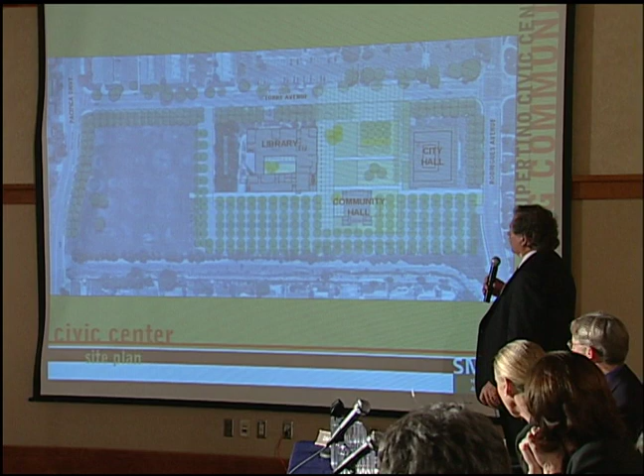The Civic Center, if you could go to the aerial, yeah, we could kill the lights now. Thank you, Kathy. As you can see, the concept, which went through all the community meetings and was initially approved by the City Council, has the library in the place of the original library as it stands today, a community hall, which is in this configuration and near the existing City Hall.

You'll see a great deal more detail from the architects on this, but just to introduce this concept, it extends way beyond just the central plaza. The parking lot is being reconfigured, and the sidewalk in front as well, and then this grand plaza, which will be at the level of the library and the City Hall, rather than depressed as it is now.

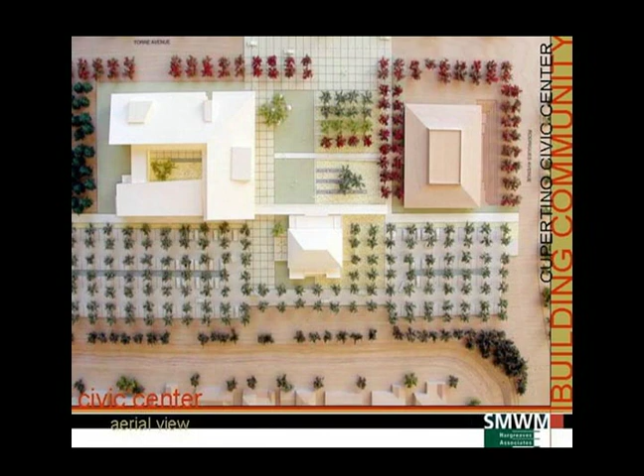One corner of it will be depressed, and we'll show you how that works later on in the presentation. It's important to note that with this combination of buildings, the library sits in a very large footprint here, containing all of its programs, and the community hall over here is designed with an architecture and a style that will not allow the library to overpower it. This building is 1/10 the floor space of this building, and so it's important that it stand out. It's a centerpiece of the plaza.

The library occupies a very good location and a grand space that will help frame this plaza from one end to the other. Could we go to the next slide? Let's go to the next one.

Before we begin talking about the community hall, I just wanted to note that this entire plaza, this Civic Center, includes the library, includes the community hall, and includes the existing City Hall. Ties them all together and creates a very grand space. That's something that those of us who've lived in Cupertino and those of us who followed the city have all felt was missing in our city for some time. This is the opportunity, as the city manager said, in the life cycle of a city, it's a rare opportunity that you get to do this, and this is our one golden opportunity, and we think this solution is one that everyone will enjoy and be proud of.

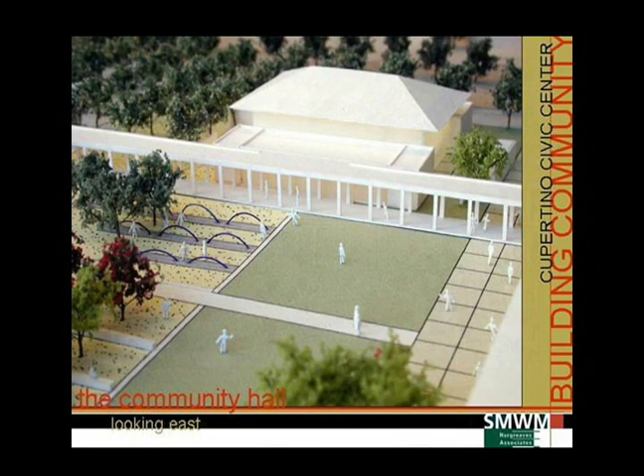I'm going to introduce two architects. The first to speak is Kathy Simon, who is the senior partner of SMWM, our design architects, and secondly, our landscape architect who has designed the plaza, Mary Margaret Jones of Hargreaves Associates. Kathy? Do I have to push that? No, you're on. Thank you, Ralph.

Mr. Mayor and members of the council, we're absolutely thrilled to be here today. This is a very, very important day for us, and I hope for you. I'd like to go through the design a little bit. You have a model in front of you. I hope that all of the people in the audience and you have had a chance to look at some of the drawings, which we'll also show here.

But the idea is to make the most gregarious, friendly, civic space we can, with an array of buildings that in their own way make a community here, but that are really for your community. It's a way that you can bring people with many different activities, including civic activities and gatherings of organizations like the Rotary Club, for example, or the Boy Scouts, or any number of things that could happen here. Weddings, you'll see, things will come to this space. And to share that with the City Hall and then with the library. This makes a place in Cupertino for everyone, a welcoming, wonderful place for people.

Next. I'd like to talk a little bit now about the community hall. It has a very simple plan. It faces the Civic Plaza. It's protected from the sun and rain by a covered walkway which connects it to the library and to the City Hall. Coming down from the plaza, you can come straight in on the axis of Town Center Lane, or come in on a wide plaza from Torre Avenue and enter the lobby of the community hall, which is also in itself a large space, a wonderful ante-space for meetings, a place of gathering before going into an event, and so on. The community hall serves many, many different purposes. In this case, we've shown it as a meeting room, which accommodates a large number of people.

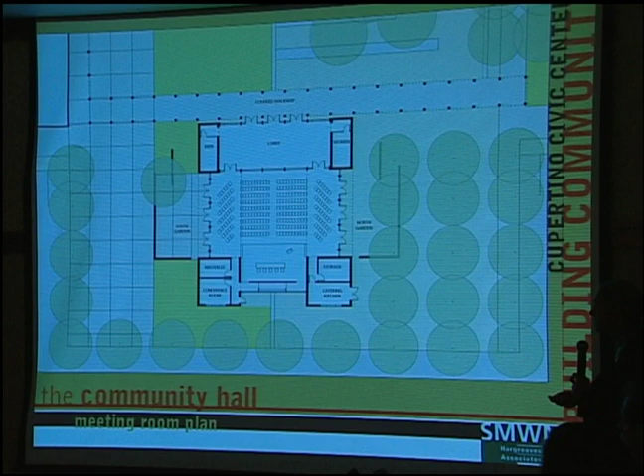Go back one more. It has a south garden and north garden, which means that the building is very open and what we call transparent. It means when you're in this building and in events where it's appropriate, you can see outside, see the trees, see the light of the sky, see the landscape. It has a raised platform, which has, again, many purposes, and some support spaces, including a catering kitchen, which will help the multi-use function of this building, but also a conference room for smaller meetings that might be pre-meetings or so on. Next. This is what it might look like set up as a meeting. It's a very tall, classic space.

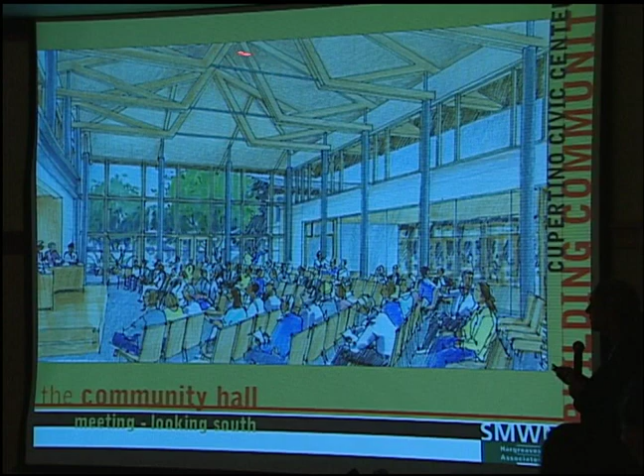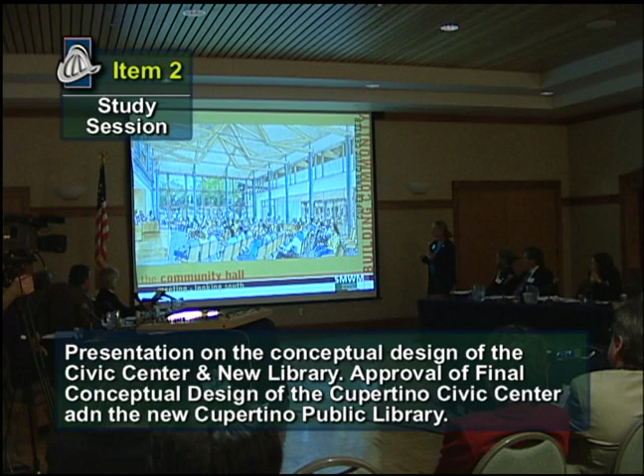A lot of parts of it are made of wood and stone. It has a beautiful open ceiling, which is uplifting. And again, these views out all the time to the landscape that's going to be so pretty in Cupertino, and already is. This shows the platform in a meeting configuration. This could be a council meeting or a seminar, and a very comfortable array of people.

Again, the dais might contain seating, but it also might contain a lectern, and it might contain a jazz quartet, for example, as shown in this rendering, where here you see a night view of what a dinner might be like in Cupertino's new community hall, with, again, a lit-up landscape outside with possibly a pre-function space, for example, in this south garden, beautiful lanterns that light up the space, and then music or events or speakers, a convivial place for people to come together.

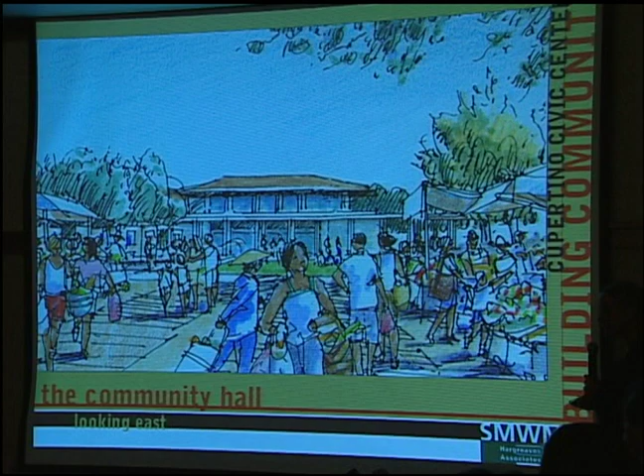Next. The idea of the building architecturally is that it's both civic and informal. It's very much an indoor-outdoor building, a building which looks out to the community space in front of it, which looks to the landscape, and which looks to the sky. It's a tall building. It holds its own with the City Hall, which is also a large building, and the library. It forms a transition from the architecture of the City Hall to the new library as well.

It makes a family of buildings here. But in no way is it like a child to these other buildings. It has a presence, it has civic energy and civic heft. It also has a wonderful forecourt, which Mary Margaret will tell you about, which is a gathering space for all kinds of people. Next. The library is a more complex building, a larger building.

It's about 57,000 square feet. It's, again, a very open building. Its entry is on axis with the City Hall. It's connected, as I said, by loggias. In this case, there's a covered arcade that's on the ground floor of the library, and we're proposing that at the corner of Torre and the Civic Plaza, the library actually house a little cafe, which is really the trend in libraries today, and could then be a place where somebody who's spending a lot of time in the library could go for a coffee.

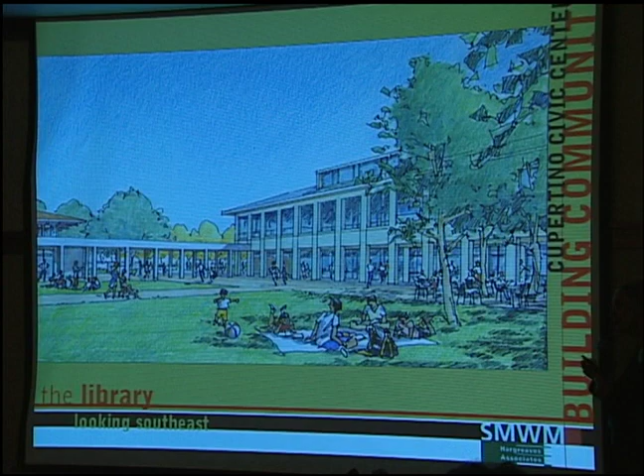It's a place that families could use to buy picnic food. It's a place where people wanting just to take a break from studying can go sit around outside or inside. It's a small area, but it really can enliven this civic space and the library as well. It's not part of the library in the sense that you have to go outside to get to it, which solves the problem of the control of the library, which is very important to all of you and to the librarians, of course. But it's a very good partner with libraries. And every library that I've seen being done today has, if they can possibly do it, a cafe like this.

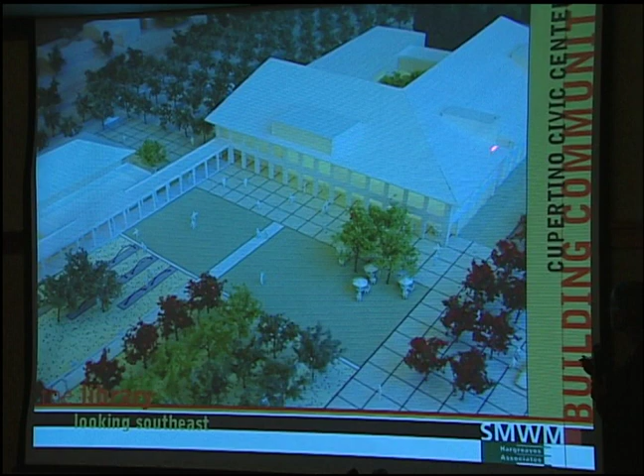Again, this loggia you can see in this model photograph. The library has a great roof, which houses above, on the second floor, the major stacks of the library for adults. Light is brought into it to illuminate the entry to the building and the stairway that connects the two floors. Again, you remember that there's a courtyard in this building and a side that's also civic along Torre Avenue. The materials are simple: stone, wood, metal, glass.

It's very open. This shows the connection between the library and the City Hall and the civic community hall here. This is the cafe. We have little model tables and umbrellas, which I urge you to look at. And this is Torre Avenue, so you can see what the whole space is like as an ensemble, a collection of buildings that are related but distinctive.

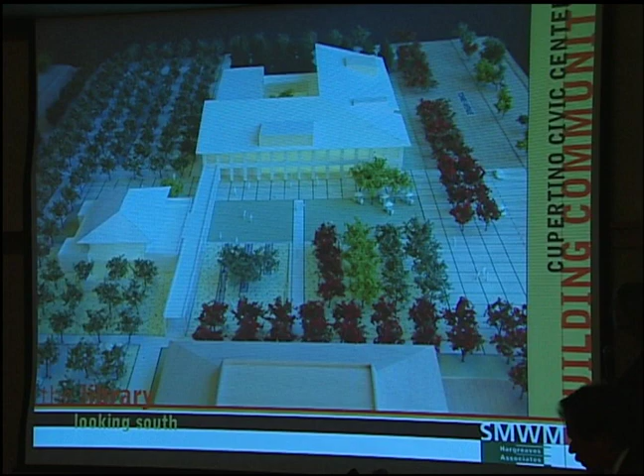Next. The plan of the library, I'll just mention very simple elements. This is the entry. You come through the control point, which makes sure that the books are secured and always checked out. There's a Friends area right at that lobby and the circulation desk. And again, the view through this will look right at this courtyard, which opens a little bit to get even more light and better views of the Redwood Grove to the south.

This is the staff area, which is a large area, very important for a library of this size, and Friends area for their storage of books. If you come in and you walk to the right, you see the browsing area, which is new books, magazines, informal reading, again, very connected to both the Civic Plaza and to Torre.

And then the large children's area. One of the really special things about the Cupertino program for a library is that a very, very large part of it is dedicated to children, which in my view is a wonderful investment in the future of this community and the future of our country. It's very large. It has room for little kids and big kids. It has a story room that looks out into the redwoods. It has a group study room for homework.

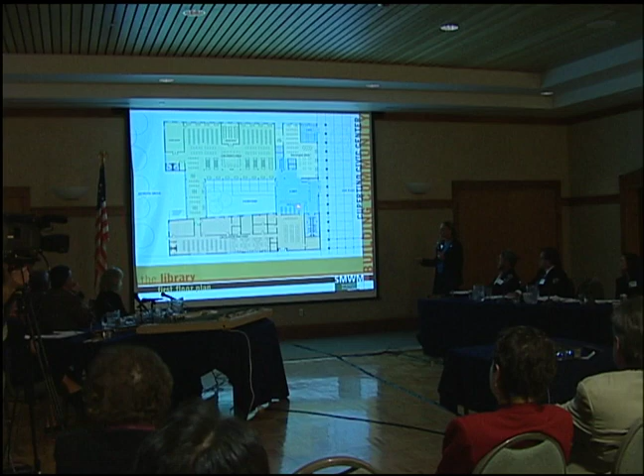And again, this wonderful courtyard, which it's related to, and I can imagine on a beautiful day, a story time happening out in this courtyard, or mothers and fathers reading to their kids in the library courtyard, which is a beautiful outdoor space. We're so blessed here to have such a wonderful climate, and you especially in Cupertino, it's unlike San Francisco, which is freezing all the time. This is actually a very affable climate. So the indoor-outdoor life of this building can happen in a secured way, as the community hall is an indoor-outdoor building as well.

Next. You go up the stairs and you find the adult collections. In this part of the library, which faces the Civic Plaza, there's the young adults, a large reference area, and the adult collections will be separated by fiction and nonfiction. There are so many settings in this building for reading and enjoyment, I think, of books and being in a community space like this. You can sit looking at the courtyard. You can sit along the edge looking at the Civic Plaza. If you choose, you can sit looking at Torre.

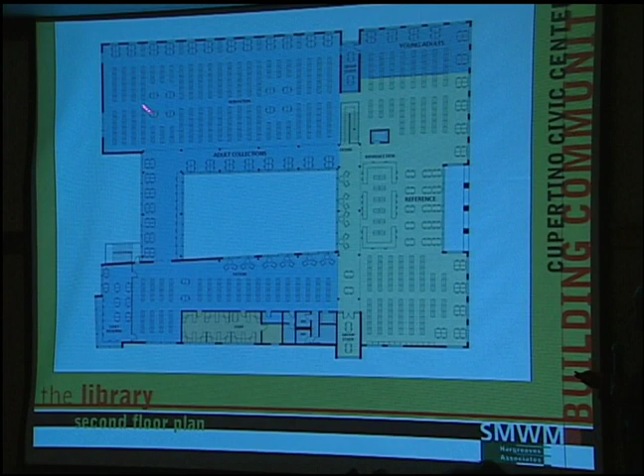Many people will be able to choose what they really, really enjoy the most about being in a beautiful building with a lot of wonderful books and other materials. There are some tables that are actually within the stacks. This is something that's done very frequently in libraries, so that someone looking for a book has a very convenient place to sit down and rest or read.

Next. This rendering shows what it might look like from the second floor, where there's a big reference desk as you come up the stairs, looking into the courtyard, and you can see the redwood trees behind, the wonderful view down this side of the courtyard toward the redwood grove again. And the idea is to really borrow the landscape that you have around this building and bring it in. The building will be filled with light. There's a large, what we call clerestory window, a large raised window on this side of the courtyard and this side, which will bring light deep into the library.

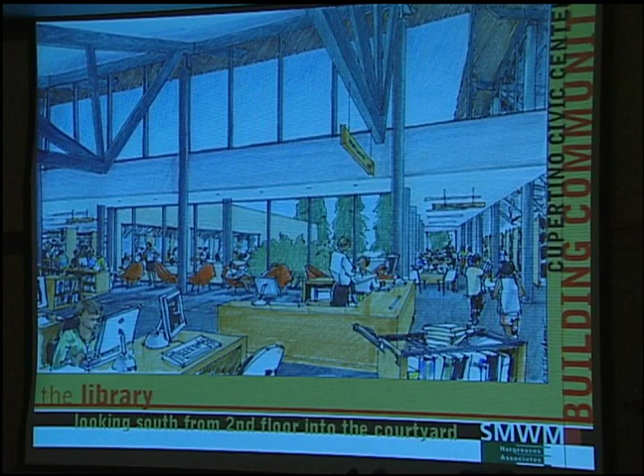It's very important to have enough room in a library like this for all the books, but it's also important to remember that reading and the life of the mind are about light. And this is a building that will be very light and airy, very friendly, and very open. Next. Mary Margaret's now going to talk about the Civic Plaza and its details. Thank you, Kathy. Next, Laura.

One of the things that was really important to us as we began this process was to conceive of a place that would be distinct to Cupertino and distinct within Cupertino. And one of the things we thought about is the history of this valley and the landscape history of this valley, which is pretty spectacular. It was originally part of the Valley of Heart's Delight, which was full of orchards. It's now Silicon Valley. But that landscape heritage led us to thinking about this place as a very distinct place, set apart from the rest of Cupertino. So not dominated by cars, not dominated by asphalt, but instead dominated by trees, the orchard effect, and the idea of an oasis that is a civic heart of Cupertino.

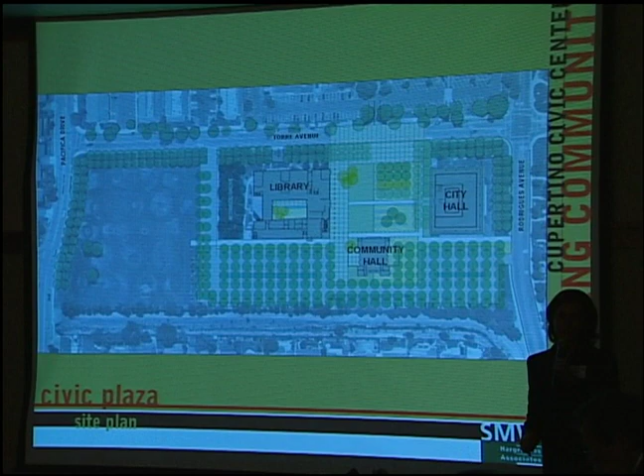So you can see in that plan image and in this model image, and in this case we're looking from Torre, here's Torre Avenue. The central Civic Plaza is a very welcoming space, it's a very open space. It creates an opening from Torre that welcomes you in. And then surrounding it, the parking lot becomes an orchard system. So you're parking beneath shade, and the climate is changed, and it gives a setting for the community hall to be a place within gardens, a place within landscape, and a place within these beautiful orchards.

So the plaza proper between City Hall, the Community Hall, and the library becomes a central gathering space that is very multi-use. So it can be one big space in a very grand and elegant way, but within that it has a variety of kinds of spaces as well, and a variety of things going on, so it will be very active and will draw people to it. The plaza along Torre wraps and fronts the library, and the cafe within the shade of the trees that Kathy mentioned happens at this corner at Torre.

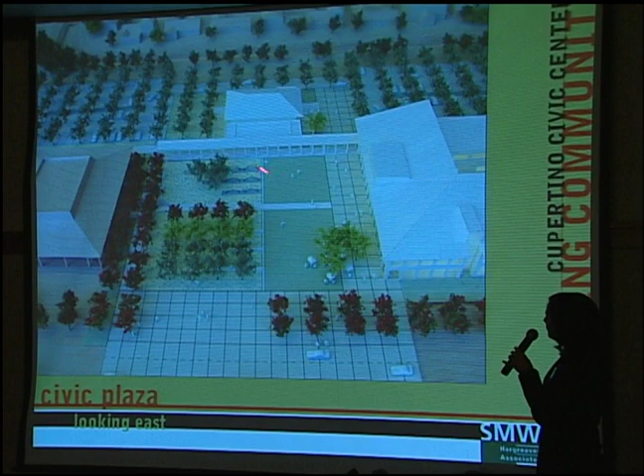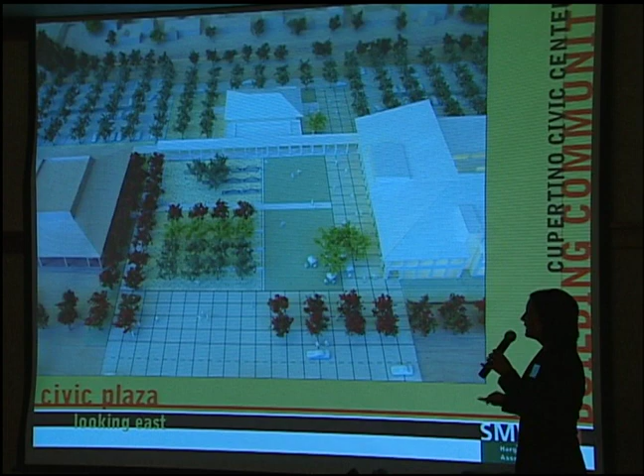Lawn areas become a place of softness, a place of respite, but they are at the same level as the doorways of the community hall and the library. And then you have a room here that is a room within an outdoor room within a grove of trees. And this grove of trees might be the trees of Cupertino. So we might choose 4 very distinct trees to feature in these rows that are the trees of Cupertino. And then seating beneath this grove of trees.

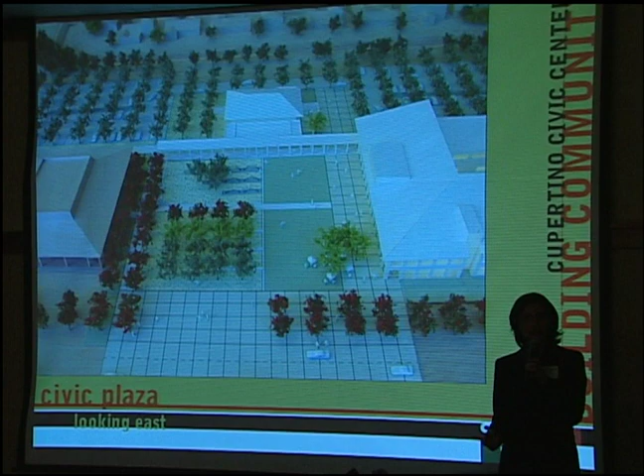And the material then in this area might be a very soft material like decomposed granite or crushed stone that is somewhat in between paving and grass. So it's porous, so the trees are happy, the trees thrive, they grow, but it's also hard enough so you can set up a festival, you can set up a performance event, and people can enjoy a very active space.

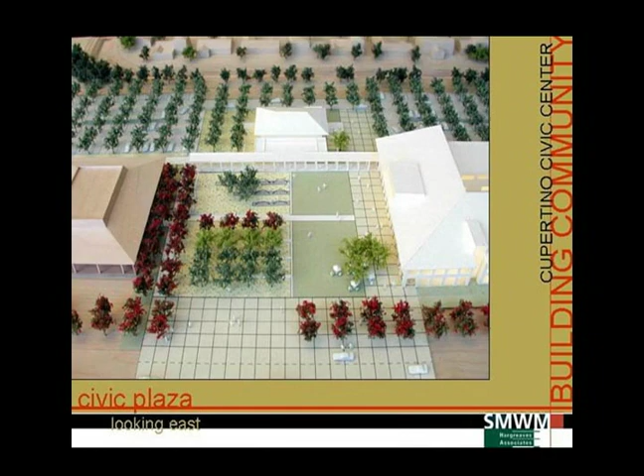And then in this quadrant of the space, and so in a way it's halves this way, and it's quadrants. In this quadrant you have a smaller grove of trees and a fountain. So it's a very sort of interactive fountain.

It's a place to, thanks, Greg. Get those lights back on.

It's a place to play within jets of water that are very whimsical, not using lots of water, but getting as much benefit as possible from the sound of water and the white noise it can bring to a space and the activity it can bring to a space as kids flock to be within the sphere of the water.

Next. So you can see this overall space that is then broken down into rooms within the overall space. You can see Community Hall then sitting within an extension of Civic Plaza, and then within that, the 2 gardens that Kathy mentioned, the North Garden and the South Garden, that could be quite different one from another. They might be sister city gardens. We'll develop that idea more, but one's on the sunny side and one's on the shady side, and that can be played up in their design.

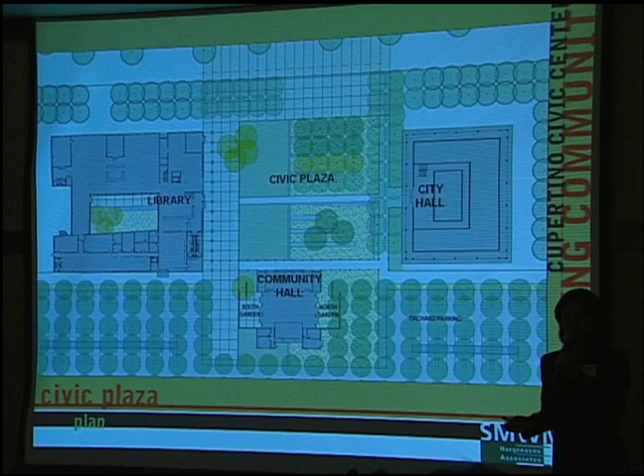And then all of that sitting within a reconceived parking area that includes trees, as well as a more efficient layout for the cars. Now, one of the things we wanted to do is address the fact that there is a very strong central axis to this space from Town Center Lane. Next. And you can see how this space is arranged on that axis.

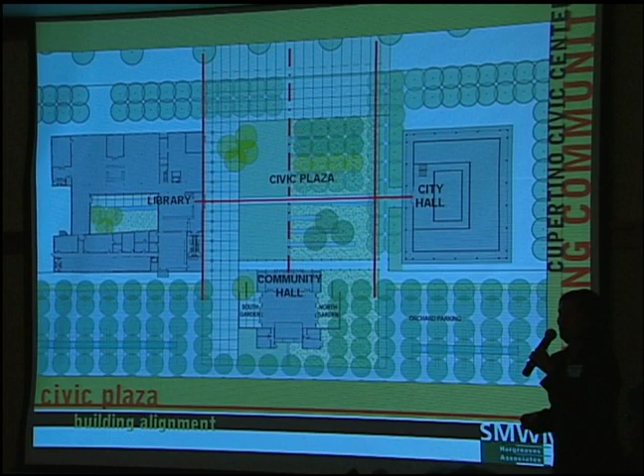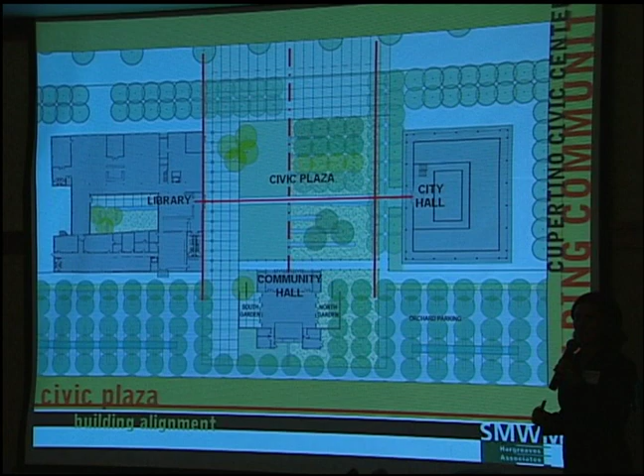So it's symmetrically arranged in terms of the library, City Hall, the Community Hall, and the center line of Town Center Lane. But the design of the plaza itself is not slavish to that formality. It uses it, it makes an elegant space, but it also makes a space that has a little more playfulness and not quite the stiff formality that we would have if we just followed those lines.

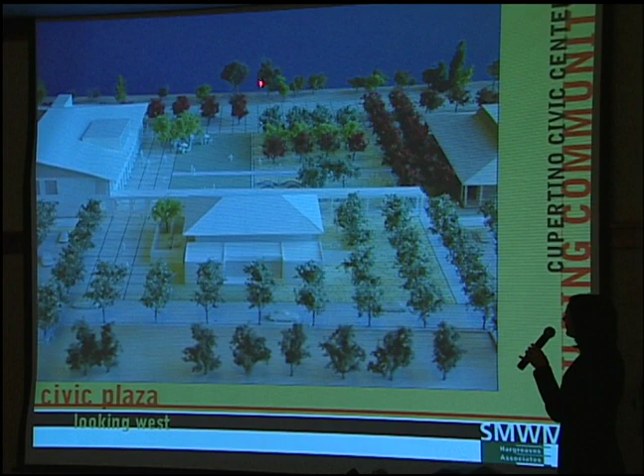Next. So you can see, looking from the Community Hall toward Town Center Lane, the fabulous mature heritage oaks that frame that axis, and you get this central axis. And on that central axis would be very beautiful special paving, so that it is literally drawn in the ground, and you're aware of that center line, and it's the division between the lawn and the decomposed granite.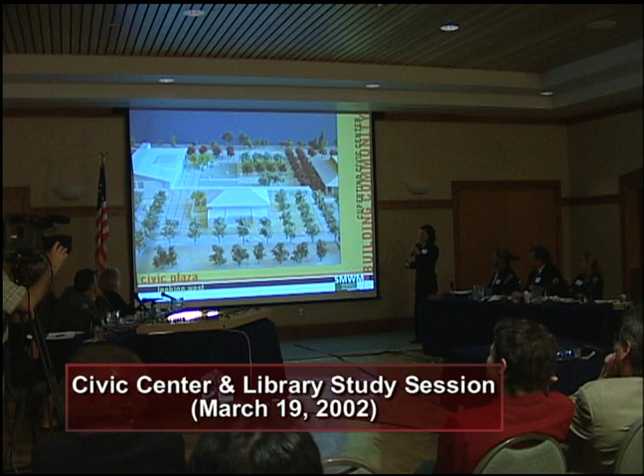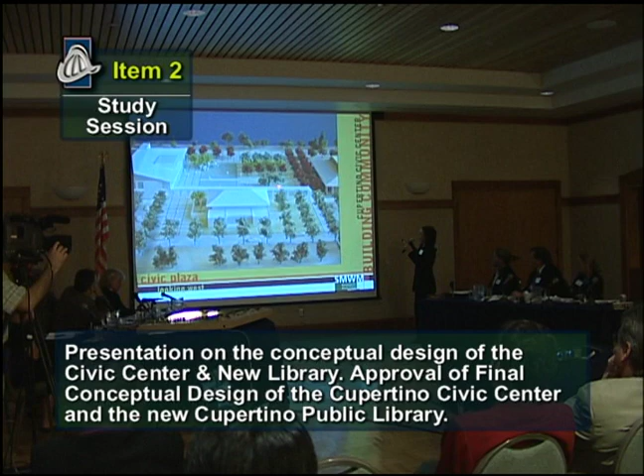It's sort of playful. It engages people noticing that this is the way the space is arranged, and so it invites participation. And you can see the cafe under the trees, the fountain area, and you can see another feature, barely, it'll show more in some other images, but there are terraces along this edge. So there is a walkway from the library to City Hall.

City Hall is set apart somewhat. City Hall is set apart by these alleys of trees, these rows of trees, so that City Hall has a certain separation from the more vibrant activity of the plaza, and the library and the Community Hall have a much more direct engagement with that vibrancy of the plaza.

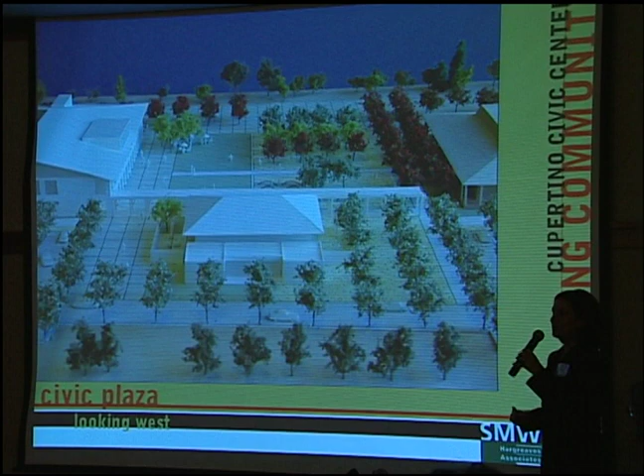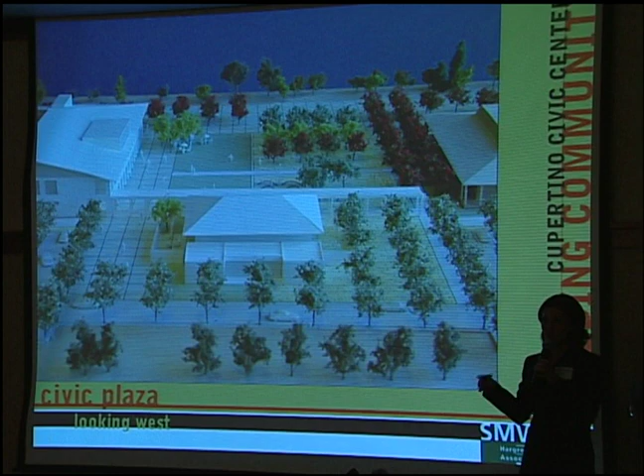And then here, this part of the plaza is slightly sunk 2 to 3 feet, so that there are terraces. And those people right there are sitting on those terraces. So it forms a small amphitheater, much different than the kind of space that's out there now, where the whole thing becomes a bathtub. This is more a tilt, so you have one corner that becomes a seating corner.

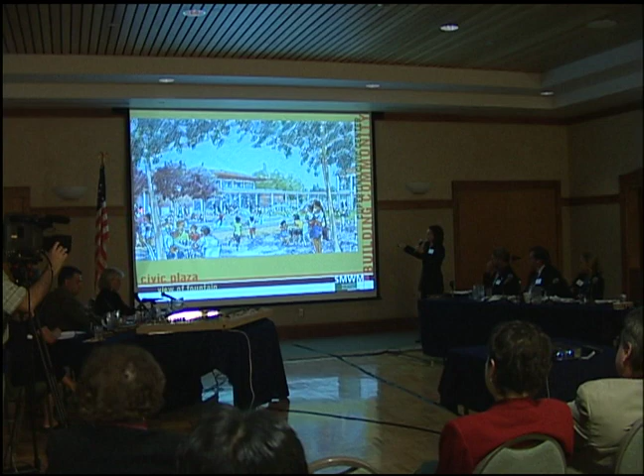Next. And you can see in this image then, those terraces are here along this edge, and then the fountain area is here, so that it is a fountain that when the jets are off will still feel like a garden space, a plaza space, and when the jets are on, it's something entirely different.

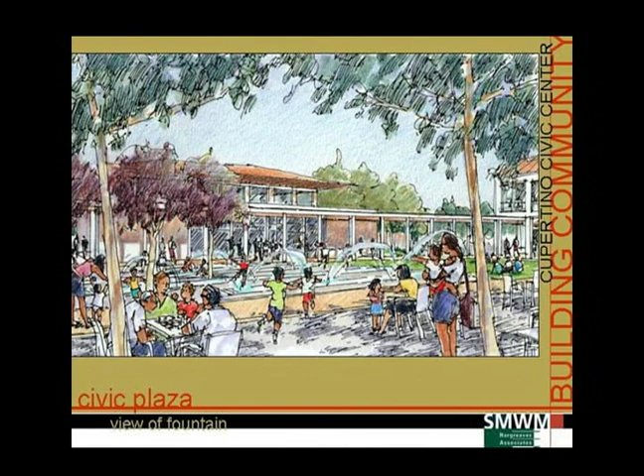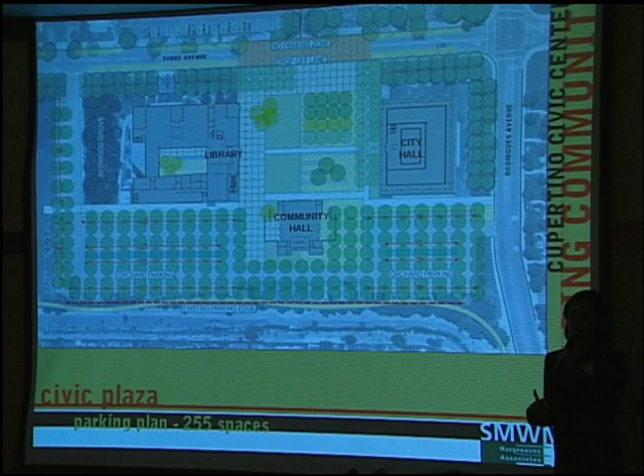Now, one of the inherent goals of this project is to make the parking lot more efficient and to have this project address Torre in a more active way. So you can see both of those things in this drawing. The plaza would literally extend across Torre and claim the street so that it becomes the front door to the plaza and you are invited in.

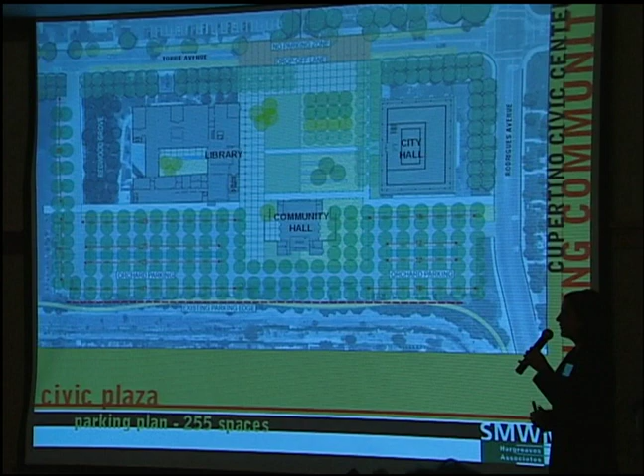And there would be no parking in that zone, and there would be drop-off for the City Hall and Library and Plaza and Community Hall. And the parking is then reoriented so it faces in a much more efficient way, and the aisles work much better for movement through the parking lot, though not creating a through freeway. And the parking becomes an orchard so that you're parking beneath the shade of the trees.

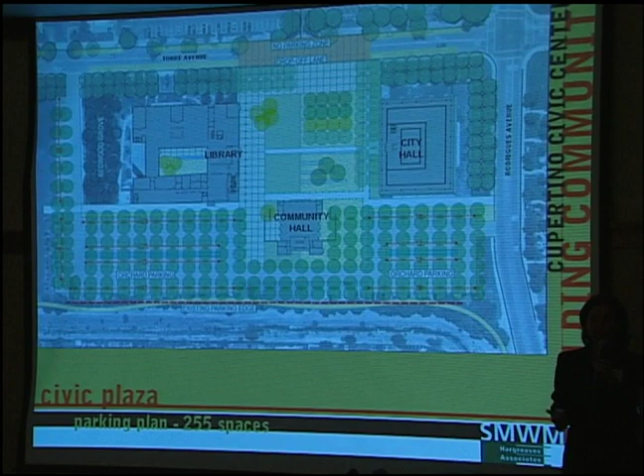It's 255 spaces total, including the parallel parking on Torrey. So even though you've gained all these trees and the impact of this landscape, you've not lost very many cars overall. Next. Now, that's sort of ripply over there.

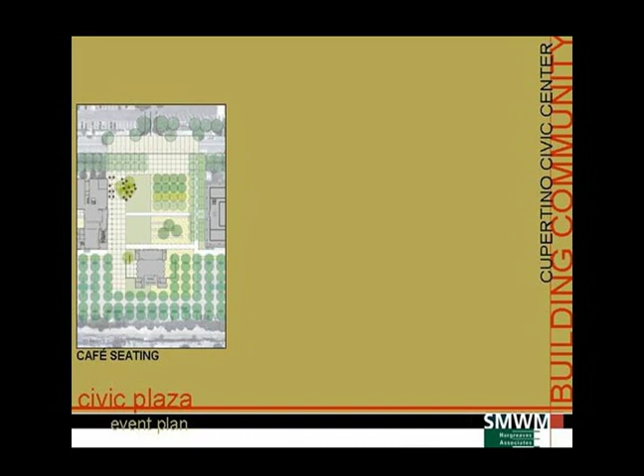We've done some diagrams to help you conceive of all the ways this place might be used. It's important to imagine it on a day-to-day basis, where there's just a few people moving in and out. Maybe it's a school day, and people are moving in and out of the space, but you can imagine people clustered around the cafe on tables and chairs. And it could be a dozen people, it could be 4 dozen or 5 dozen people. This shows 52 chairs around tables.

Then you could imagine dinner for a special event at tables set in the north and south garden on either side of the community hall. Very special occasion. And this could be 150 people dining in these gardens. Or you can imagine dining under the stars, and Civic Plaza becomes an outdoor banquet space for some special event. And this could be hundreds of people, even 1,000 people sitting around tables beneath the stars.

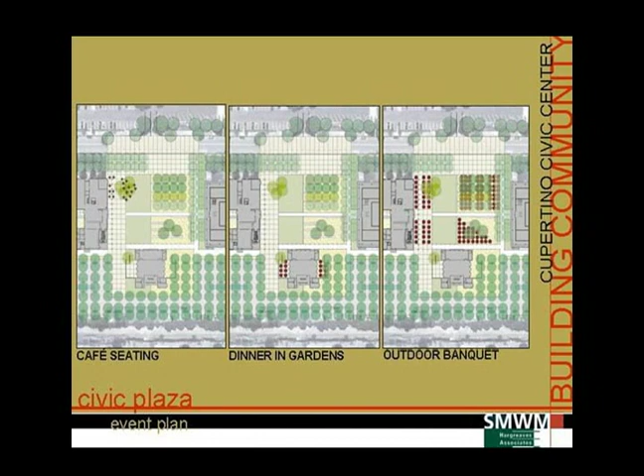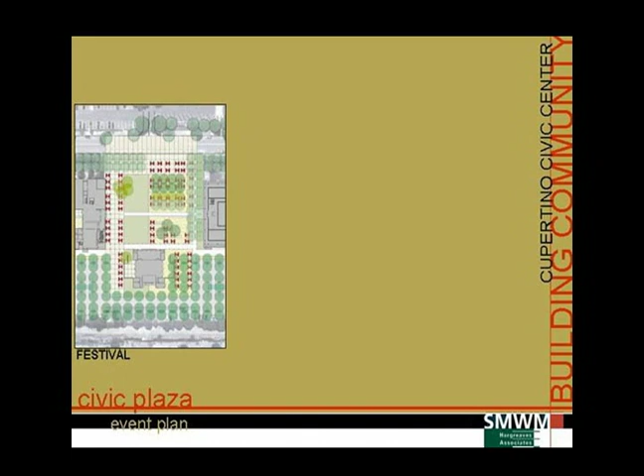Festivals are another use that will enliven Civic Plaza. And it's important that it be programmed. It's important that it be thought of. It's as important as the community hall in terms of becoming a venue for your expression as a community. It becomes a theater or a platform for all the ways you want to use your civic place. So imagine a festival with tents lining the central space.

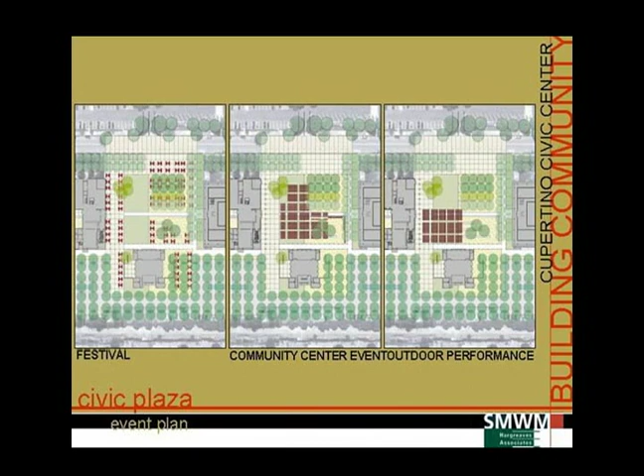Or imagine a projection of a movie in the plaza and 500 chairs moved into the plaza for people to watch that. Or toward the library, maybe someone is giving a speech in front of the library. So these are different ways that the plaza can be used. Or you can imagine all of Torrey Avenue becoming a festival plaza, so that the whole district becomes a festival space, and Torrey is closed to traffic, and booths line Torrey Avenue.

Special performances like Shakespeare in the Park happen within the plaza itself. You can imagine a connection then to the fields, and this whole district within Cupertino becomes a place of special events every now and then.

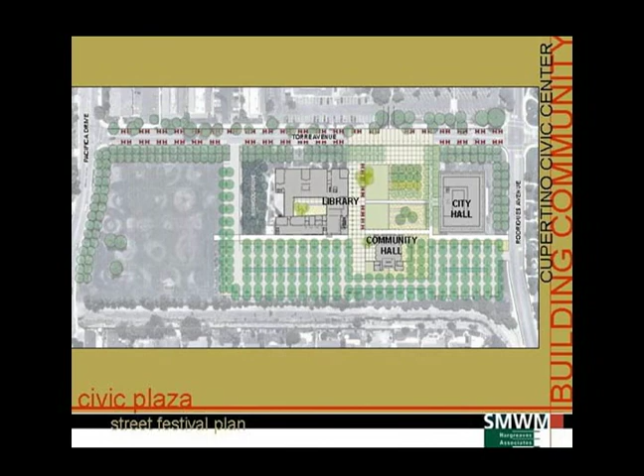So multi-purpose, a high degree of flexibility, very appropriate for an intimate number of people, also very appropriate for special events, but most of all, very lively on a day-to-day basis so that people want to come, they want to go to the library, they want to get a cup of coffee, maybe they don't go to the library or City Hall at all, and they come here to have lunch and hang out in the plaza. And that's what this idea is for Cupertino.

I'll just conclude, Mr. Mayor and members of the council, by noting a couple of things. Would you go back to the last slide before? I wanted to point out that, of course, our original charge from you and from the community was to maintain this project within the budget that you adopted last June. Just $22 million for the library and a total of $3.5 million for the community hall in the square. What you see before you is a concept that will fit within that budget.

Kathy mentioned the library is 57,000 square feet. It's actually more like 54,000. The additional 3,000 comes in the program area that would be used by the library. They wouldn't use the whole community hall, of course, but that meeting area would be the same program that the library program contains. So for all intents and purposes, it's 54 plus 3. That doesn't include the cafe, which is probably 500 or 600 feet. There are two things which are not in that budget, that $25.5 million. The trees in the orchard.

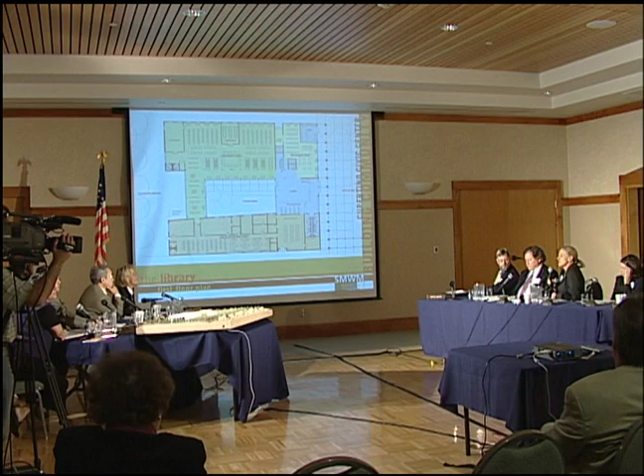I'm guessing, but... May I answer? Please. This is very preliminary. Of course, we'll do all the necessary checking that is important to have. This is really a conceptual design, and we believe that we need more restrooms that are easy to have.

Oops, was it off? I think that's working. It was. Did you hear me? Oh, did everybody, should I say it again? Yeah, roll again. I'm sorry.

I told Councilmember Sandoval that we're at a preliminary stage with the library still, and we haven't really done the detailed research about exactly how many fixtures we should have. It's very important that there be enough. Of course, we also have them in the community hall, so when there's a meeting going on that's library related, that will also be available. Right. The children have them because they need them, and this should be an adequate number for the kids, and their staff also has them down in their staff area, down in the lower left-hand corner. Those are staff restrooms, and we'll definitely be looking into all those details in the next phase. Great. It's very important, I agree. Thank you.

Can you speak to the environmentally friendly aspects that the library will hold in terms of photo cells? I see a lot of light coming in, and I've seen the drawings and the representations here, which I think is marvelous, because natural light, I think, is coming in from two different sides, both the courtyard and then from the outside. But what other environmentally friendly aspects have you drawn into this?

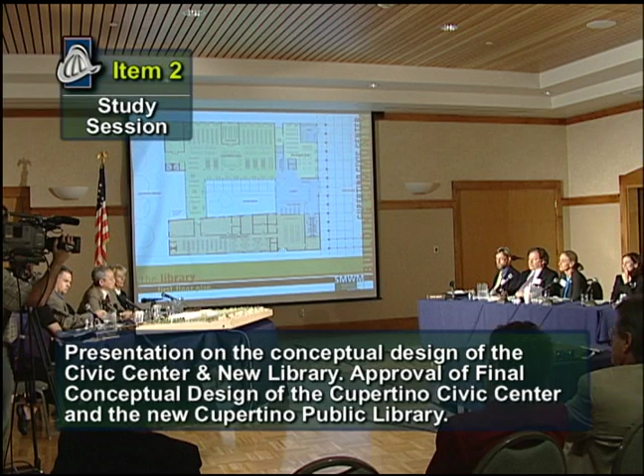Thanks, and congratulations, by the way, too. I know the commission and the foundation and you folks and staff have been working hard. I think it's a beautiful project, and I reviewed some of those bigger drawings in the back, and just think it's great. Thank you.

Ready to go? Should I ask a few questions? Sure. Just to follow up. Sure. Can you hear me?

So what we're seeing is pretty much to scale. Is the representation in the group study room to scale? Is that like 9 tables in there, roughly speaking? I guess that's correct. Again, I want to emphasize what Kathy said. This is a conceptual drawing. Sure. It pretty much shows you where everything goes, but there's a great deal of work left to be done in the details of how that comes together. But generally speaking, that's the general concept, yes. Good. It looks like it's bigger than what was there before, so I want to acknowledge that, and I think that's a good direction to go. I think there's quite a bit of need for group study space.

Going to the community hall, that space inside, how would that space compare in size with this room? Can you give us a sense of that? Well, this room is only 2/3 of its regular real size. Right, because that's a movable partition. Right. It's slightly smaller, but it's actually very, very different in character, as you can see in this drawing. The idea is that it's an ascendant space. It's a celebratory space. I want to reiterate what Ralph said about its flexibility. It will have all the bells and whistles that it needs from an audiovisual standpoint, which most of these don't have.

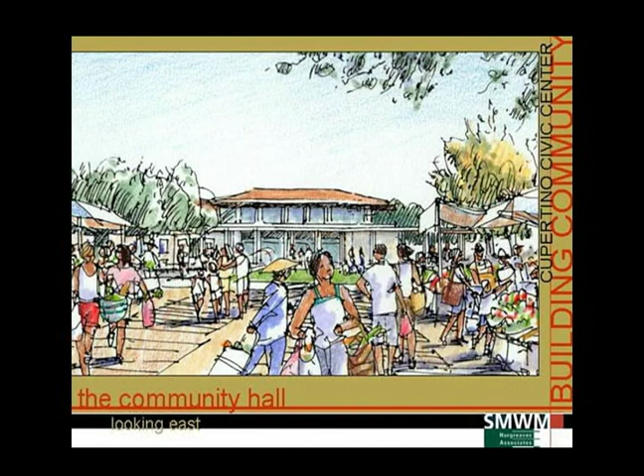You'll see the community hall, but you'll see the activity and the life of the plaza in front of that. So it isn't just a sterile view like a view of the Washington Monument. It has that presence, that elegance, that stateliness, but it also is full of the life of this community. Thank you.

Just want to compliment staff and consultant for a job well done. And I'm also pleased to learn that the project is going to be constructed on time and within budget. Speaking of budget, does the $22 million include furniture? Yes, it does. Okay, so it will be turnkey except paving and some landscaping. Well, that would be the orchard in the back, and maybe a portion of that is an add alternate to the bid. The bidding climate's good, we might be able to include it. We certainly wanted to include it in the master plan because we think it's an integral part of the whole.

Okay. I want to ask a question regarding parking. You indicated there are 225 parking stalls. How many parking stalls are available at the present time? Currently, there are 227, and there are something like 50-plus parallel parking spaces over the length of Torre.

But the building will be 100% ADA compliant, and it's a federal law. And I think that's very appropriate because, again, the idea of making this accessible and welcoming to everybody, regardless of whether they see well or hear well or are disabled in some other way, it's very important that everyone have completely free access to this. I wanted to add, too, when you raise that plaza up to one level, it becomes extremely friendly to disabled persons. They can get anywhere on the plaza, whereas now, of course, you can't get down there very easily. Okay.

My next question is, what are the efforts you are taking for energy conservation? Would there be any motion detector or on and off switch type of device to conserve energy? All those things. I think you heard Kathy's response to Councilmember Sandoval. That is a huge consideration for us. We want to maximize our savings. We've done a number of things as a city to do that, and we certainly would take advantage of that here. Okay. My last question is, could you go back to the community hall slide, please?

Okay. The conference room in the bottom corner there is next to the mechanical room. Will that have a lot of insulation for any noises, because you will have compressors, air conditioning units? Yes, of course it would. One thing that I should point out is one of the advantages here is that in the community hall, we will be piping in from the chillers and the plant that's in the library. So we won't have a second plant here. We'll have air conditioning units and that sort of thing, but we will draw the chilling and so forth off the library building. So that's why it doesn't need to be so big.

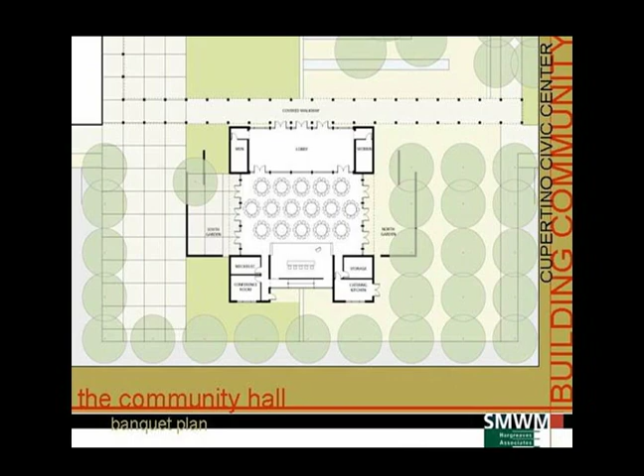I see. But the idea, I think it shows in this, that you can actually see, this is the wall that you're talking about, and the door is at one end, and here's the other door. So actually, right in this drawing, you're looking through that to the lobby, through the arcade, which is just a little bit noticeable, and then out to the outdoors beyond. So the idea is to make it really open, so no one feels excluded. Everybody's welcome. It's the seat of government in America that is meant to be very, very open. It's not really the seat of government, your city hall is, but this is a civic room for civic events as well as fun events and formal events of all kinds. Okay. Thank you.

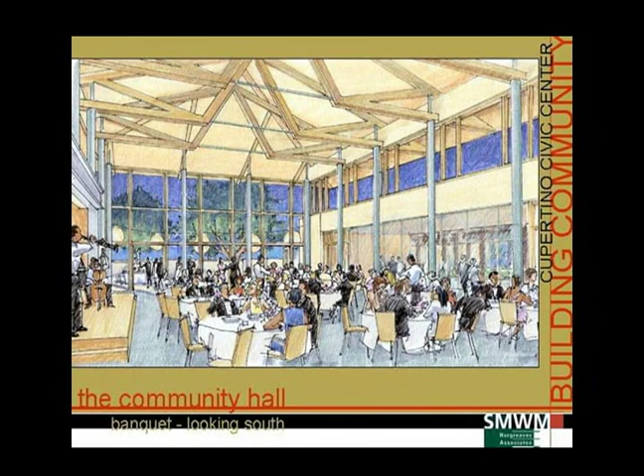I love the way you can look through and see to the Redwood Grove, and that you can be inside the library and still be outside, and vice versa. I think that is going to be one of the things that makes our library unique and defines it.

I just was on a vacation in Phoenix, and they have an absolutely gorgeous new library, and none of you will be surprised to hear this, they have a specified teen area in their library that's like state of the art, and I got all the literature on this. I can pass it on to all of you. We don't have the space to do what they did, but the whole idea of it is very unique, and I actually spent some of my vacation going through the library.

And there are just certain things about libraries that define them, and I believe that part of ours is going to be defined by that wonderful courtyard and the fact that everywhere you look, you're going to see trees and the outdoors, and celebrate the agricultural history of this community, as well as our wonderful technology.

I was delighted to see Apple computers in your renderings. I did notice that. And since Apple has been on board with this library, and I've been working with them from the beginning to have a wonderful way for them to participate, I was delighted. Eleonora, be sure to tell them that.

I love the fountains. I'm a great believer in fountains. I think the feng shui of fountains is important. I think the serenity of fountains is important. I think the playfulness. I love the fountains that you have incorporated. If there's any way we can do more, I would even do more.

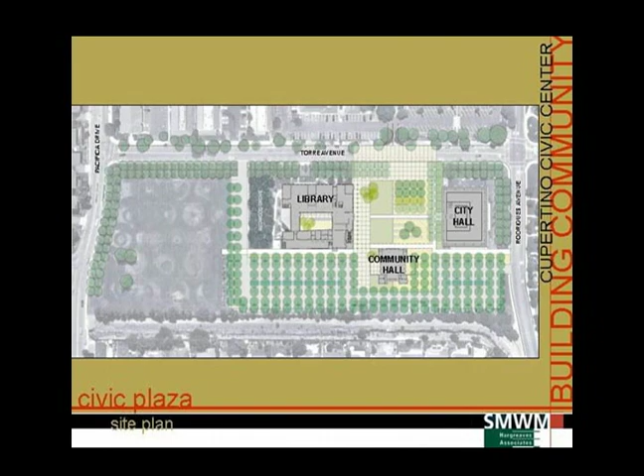I like all of the trees with the benches under them. I think that's very, very important for our community. Anywhere you go in this community, you see that. You see our seniors walking along and wanting to stop and rest. You see our kids playing. We see people rollerblading. There's people wandering. And I think if you give them a place to sit and you give them a shady place to sit, then they want to come back, and it works. So I'm absolutely delighted to see you work that into everywhere it is.

The one thing that I would like to see you consider is, do you call that the colonnade? Is that what you're calling that? The colonnade area that goes along the front aspect of the library and then across from the library to City Hall. And I know you haven't defined what that surface is going to be yet, what it looks like, but the one thing that's missing for me is I would like to see the hard surface to hard surface there softened up with pots, some kind of a potted vine or something along the colonnade that grows up with lighting on it at night.

And I already talked to Dave about that. It's the one thing when I see it that's missing for me, it's too bold, and I think with all the rest of the foliage, I would like to see you consider something like that there.

The other thing that's missing for me, and perhaps this will happen inside the library as well, is I would like to see a venue for some kind of artwork that our local residents, especially the children, do, whether it's murals somewhere or it's a rotating facility to rotate artwork or something. That's a big part of who we are, and I think in this kind of community gathering it's really nice to have some place like that that will work.

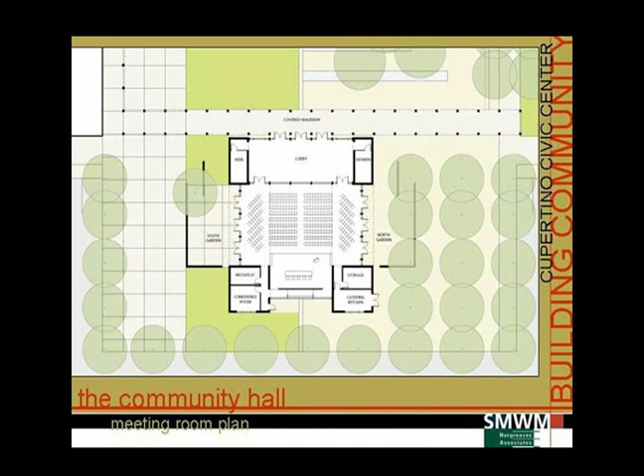So whatever can be done to make that a little more flexible so that people can feel incorporated. Now maybe that's just AV equipment. I mean, maybe it's just a sound system so they can sit out there. You know, I remember my church when I was growing up had a place where you put the little kids that they could see but couldn't be heard. Maybe, you know, I don't know, whatever you think.

Next, I love this space, and as Sandy said, I think the mixture of textures is going to make it very special, and to me, reminiscent of some spaces in Europe that I've been to, some places in France where they use a lot of mixture of texture like that, and it's a very subtle design thing, but I think very valuable.

This is becoming a bit of a parks and recreation space, and so I would hope that somebody experienced in the user side of parks and recreation gets involved with ideas. And further to that, I've always been on the case here of the community integration aspect of this project, and I'd ask that we get a sort of an urban planning audit, somebody completely different from the urban planning world or the placemaking world that says that in their opinion, people will come.

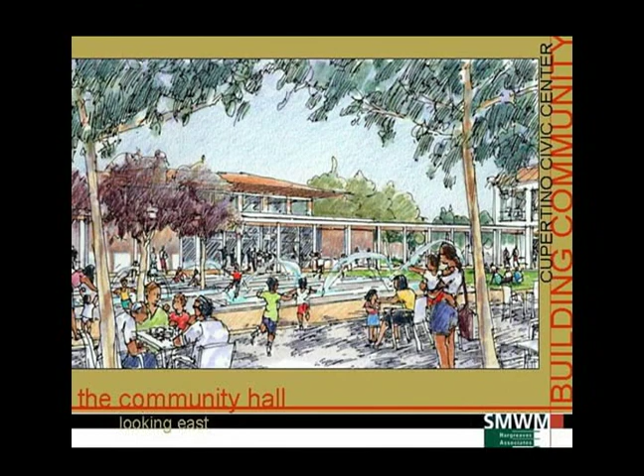That's my big paranoia. We'll build this all, and all those people, those little white people there, won't materialize. And it'll look splendid. I don't have the talent to figure out what draws people and what makes empty spaces. I've read something about it, but I don't trust that I've learned. So I'd like somebody completely independent that's just into spaces and placemaking to come in and give an independent opinion, hopefully constructively.

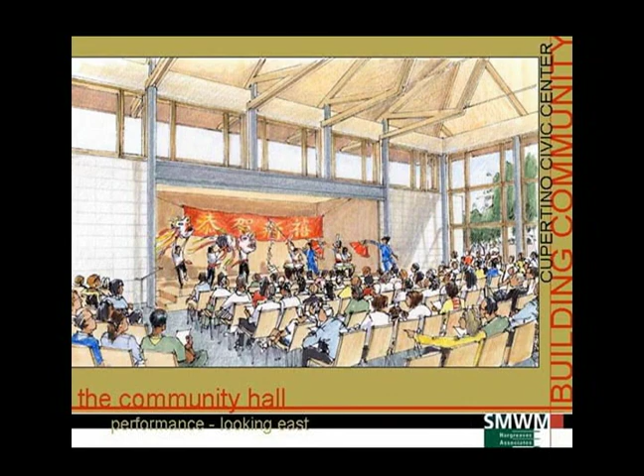And again, in terms of the parks and recreation aspect of it, I don't know if we have enough activity here, things to draw people. We have the cafe, and it seems to be the central attraction for people, of course, besides the library. So I don't know if we want to program more things there.

I don't know if we want chess tables there for people to sit at, or a bocce ball court under one of these strings of trees, or just something else to give it some interest and some draw, and something for the people that are going to come here to watch. So even if they may not participate, it'll make it a more interesting space.

Let's see. The lighting, it strikes me that if all of our grand plans come to pass and the town center development happens, and you can actually see down here, maybe in an occluded vision, all the way from De Anza Boulevard, we would probably like to have some kind of low level of light here, maybe late into the night, maybe till midnight or something, to give more of a sense of place for the whole community.

But to do that, I think you're going to need to design it so we don't attack our neighbors across the creek. So I think it needs to be taken into account that we would like some light shining out to the business area, but not to the residents. And it's probably true on the library and on the community building, it would just be nice to have sort of a glow there during the night. But if we don't do it right, we'll have to shut them off because we'll wake up the neighbors. Can't do that.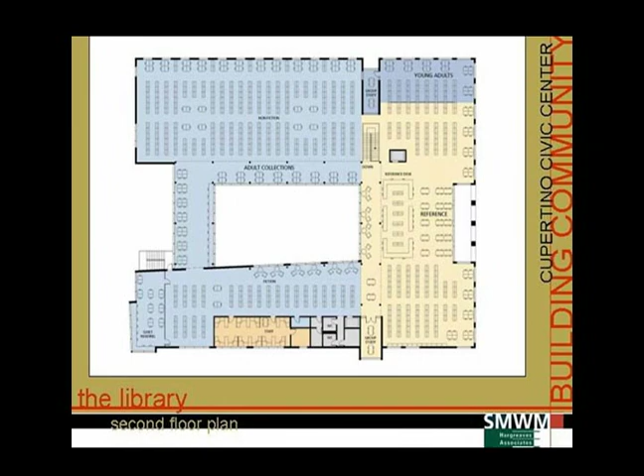I had a question for you on that, Ralph. We've talked about it before, but I don't know if you've ever assigned a number to sort of the effective space of the current library. There's some efficiency loss and whatnot, but do you have a number that you use? Yes, the current library is about 37,000 square feet.

And we think that if you apply just standard good practices and were to rebuild that building at 37,000 square feet with the technology and the architecture that we are providing in this building, you'd achieve right off the bat anywhere from a 30 to 40% increase in efficiency without adding 1 square foot. We've tested that against the program, and that seems to be real.

When you add the number of square feet that we're putting into this building, and I do count the 3,000 square feet in the community hall because that will be readily available to the library for its use. It will not be occupied all the time by city uses, and so it's a very valuable space to them. We think that increases the capacity of this library to operate by a substantial margin.

So let me just guess from your numbers. Would you say something like 25,000 square feet is the effective size of the current library, or something like that? Yes. Okay. Ralph, I have a question for you. If we are going to expand the library in future years, where will be the direction? Would it be going that way, further towards the community hall?

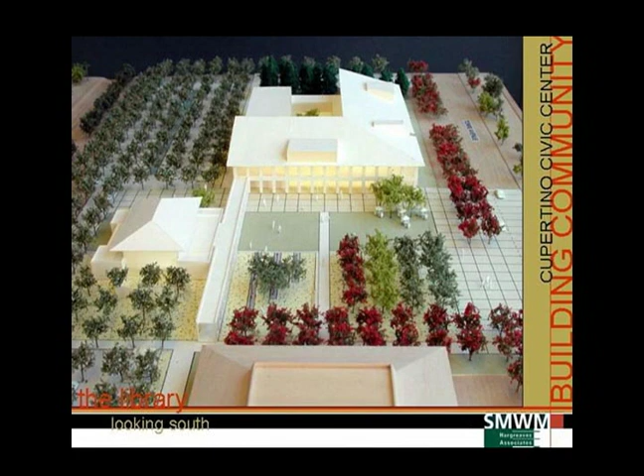There's plenty of land next to it, but how that would be configured, we don't know. We've tried to design a complete project, and we have the Redwood Grove to one side, you have Torre Avenue on the other, the plaza on this side. That would take some real study, and I would not want to speculate here today on that. I'd just like to add one other thing to this.

I believe that libraries will always be wonderful places for books, but we know that the digital world is coming. It's here to some extent, and in thinking about libraries today, we're not really sure they're going to need to grow to accommodate more information.

To design this building so that it can expand is a good idea, but it may be able to expand within its square footage by just simply digitization and miniaturization, access to connections, for example, digital connections to Stanford University or to some of the other resources around the Bay Area, so that you end up really not having to expand the building to expand the collection. And that's really the most that anybody can predict, is that we really don't know. But I think that that's definitely a possibility.

Can I also ask a question? Oh, are you done? Did you want to put in? No, just to follow up, just to personalize this, when I was a kid, I had a huge bookcase with all the encyclopedias and reference books. My two sons have it on one CD. And, you know, that's pretty common. And I think with what Kathy is saying, we can look to the future with some of that.

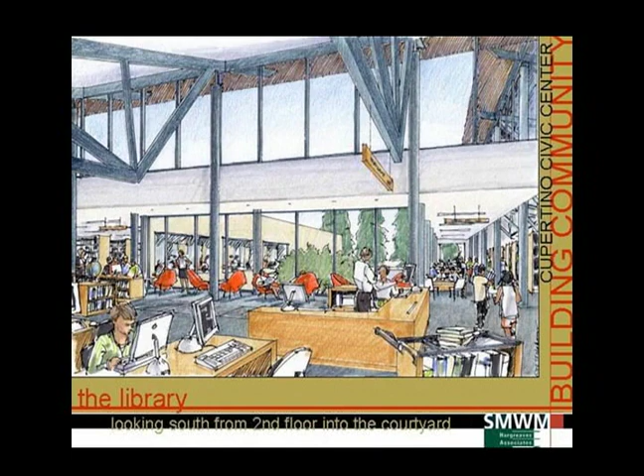Well, what would it physically feel like or look like in the new library? And as we know, when you have great facilities, if it's successful, it draws more people. And what we know of the senior center, I think our membership used to be like 800 or something like that. Now it's 2,000 and it's still growing. So I'd rather err on the safe side and have you talk more about that at this point.

Let me take a shot at that. We have, with 37,000 inefficient square feet, the best library in the country. So I feel pretty comfortable that by expanding that substantially and making the use of that space more efficient, I mean, how good do you want to be? We're certainly going to be an outstanding library, and I think an example that people will look at around the country.

In addition to that, in terms of the collection, remember that our library in Cupertino is part of a much larger system that has a very large number of materials and has access outside of its own system to practically any piece of information you want anywhere in the world. So the availability of information in the new library, indeed in the current library, far outstrips the square footage of the building that we currently occupy. The building we will occupy will be larger and it'll be far more efficient. So I don't think that need be a concern.

At some point, I suppose if people come in larger and larger numbers, just the physical presence of human beings in the space could be a problem. I don't think that you're going to hit that level. Again, there is no upper limit. If you were to ask people who are supporters of the library, there is no upper limit to how large the building could be. So there is some practical limitation.

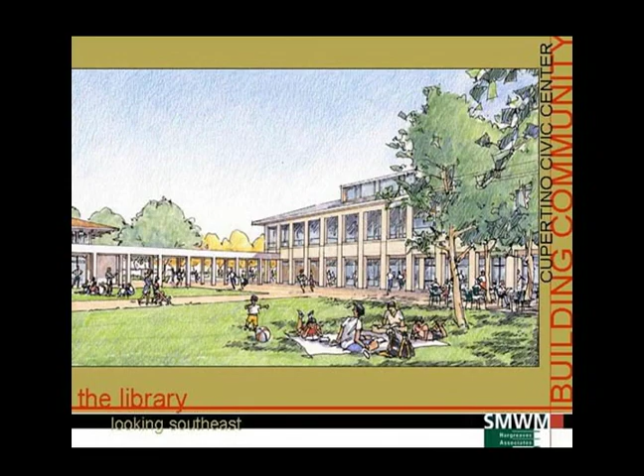Thank you. And I would also point out that the 37,000 square feet includes about 1,500 square feet of meeting room, which is not used for anything but meetings. Now you have this 3,000 square feet available in both the lobby section and the meeting room on top of the 54,000 square feet, and of course almost 4,000 square feet in the courtyard as well.

So I think that we have maximized the city's investment into this project with the most efficient, greatest use project that we can have. That has been our watchword all along. And for what we can afford to put into it, I think we have absolutely the best building and the best result that we could possibly get.

If I could just add to that, being in from the very beginning, one of the things that the library community, the users, the staff, everybody's talked about with our current library from the very beginning is whoever designed that library, the way it was designed in its circular fashion, it is the most inefficient building for a library that I think most of us have ever been associated with.

So to compare the square footage of a building which we have spent years talking about as inefficient, poor design for the staff as well as for the user, and then compare that with a brand new design that incorporates all of the current knowledge we have about library sciences and library uses to the maximum efficiency, is really comparing apples and oranges, and I think we do a great disservice to continue to do it that way. And I just want to caution everybody that it's not really fair.

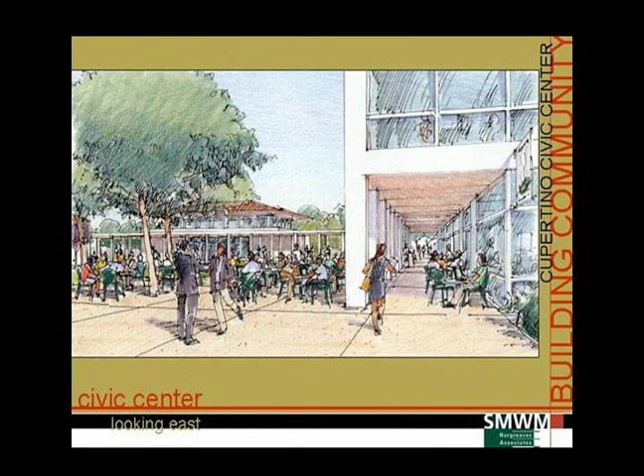In keeping with my concerns about the space, is the cafe within the 54,000 square feet? Because that's another 600. Got that on tape. No, it is not. It is not. 500-600 feet, we're not sure exactly, but we have not calculated that as part of the library program. Okay. One other point on the cafe, I'm assuming that that will be staffed by the city and those expenses will not be borne out of the library budget. It's not the library, but typically what you do with that space is put out an RFP, franchise it out, and let an operator come in and build it out. Fabulous.

Okay. And then my third question would be, I think from the very beginning, we had concerns about designing the building so that if we need to increase size of the building, that could be done. Is that being considered in the construction of the building? No, not really, not at this point. We're designing a complete building, and any expansion of this building in the future, however that's accomplished, you would have to accommodate it from one side of the building if you wanted to make a contiguous building. It could be done, but we're not designing it with breakaway walls or anything like that. Okay. Let me rephrase it. Is there consideration being given in the design of the building to add additional space? No, not to this building, no. Okay. Thank you.

And I have one more card from Yufen Wu. Well, at least I know it's Diana. That's my official name, yes. Yufen Wu also goes by Diana Wu. I live at 10445 Imperial Avenue. Today I would like to represent myself as a private citizen. I do have two questions.

First is the cafe in the library. In fact, I'm a professional librarian at San Jose State University. Eating and drinking, actually, it's a good idea to put the cafe in a library because it's a big demand. You know, it's very difficult to police no food, no drink in a library. It's a trend to move into that direction, as long as we trust our patrons to obey the law.

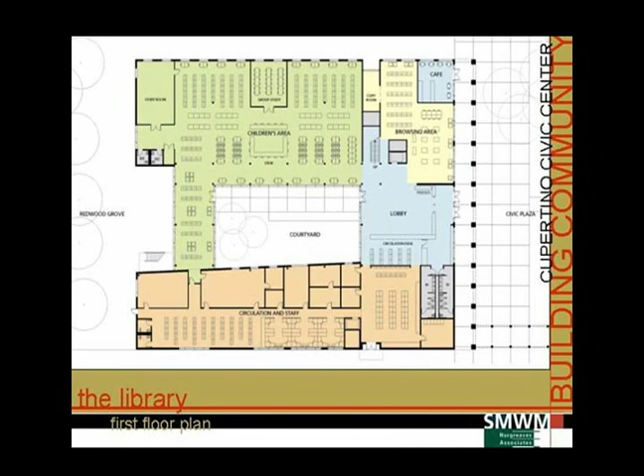Somehow, as we go down the road and become more detailed, even some inclination of the staffing issues, or operations, or how much maintenance is this going to be, just ballpark, just so that we have a sense. For instance, the question about the cafe, who's going to run it? How's it going to work? Just give us an idea, because that also translates into operational costs. And the library, is the assumption still pretty much the same size of librarian force that we're using? Is that assumption still good?

All in all, I'm really looking forward to your next phase, looking at your schematics, because it's always the details that really matter a lot. And as we go to that level of thinking, it's very exciting, and it has so much in it. And again, just to really appreciate your very wonderful work.

Thank you, Michael. Bella, do you have any closing comments to make? I believe many of my comments have been alluded to by my colleagues here. I would just bring up a couple of key issues and just dovetail on something that Michael just hit on, which is staffing inside the library.

I'd also ask you to look at staffing outside, because now with the addition of the orchard, the parking orchard, and trees in the courtyard, etc., what does that do? And Ralph, that's probably more of a question for you with your maintenance staff. And ask that we pursue an agreement on loaning and lending with De Anza College, who has a pretty extensive library also. We don't always have to think of big four-year private universities.

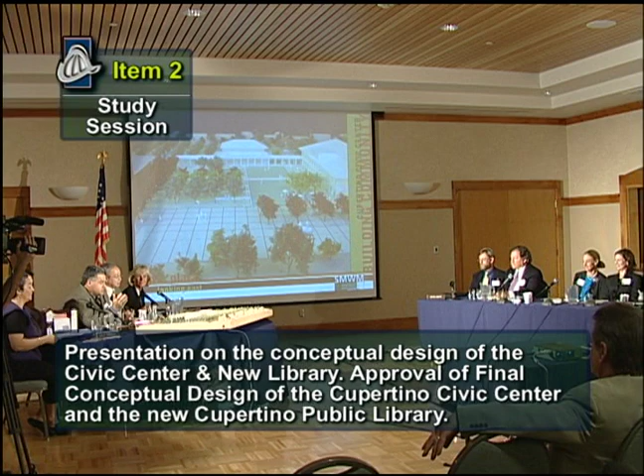Say aye if you agree. Aye. Any nays? Don't you dare. We're unanimous. Thank you very much. We're adjourned.